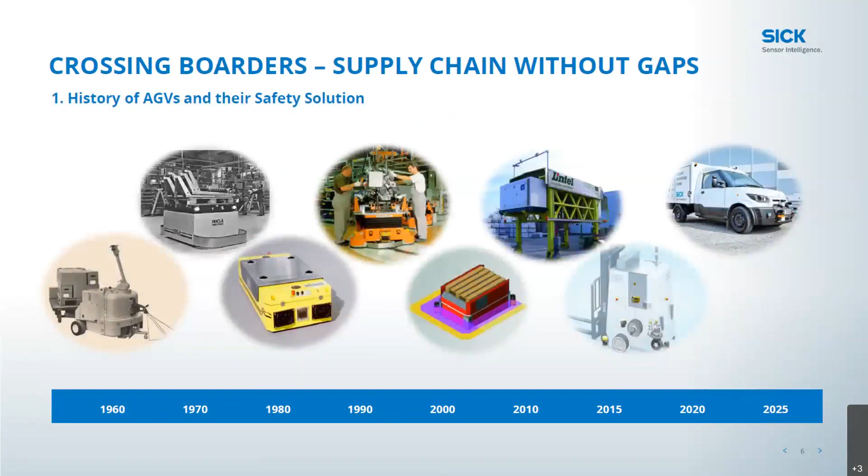A very brief history of supply chain and AGVs. I won't go through each one of these individually, but rather just show you where we've come from. If you go all the way back to the early 60s, the concept of automated guided vehicles had started then, with simple things that made sure AGVs didn't run over people by having tactile metal frames on the front of pallet jacks, automated pallet jacks and things like that. And those went into real bumpers that could stop the vehicle.

All the way up until the early 90s when SICK invented the safety laser scanner, the PLS, if any of you are familiar. SICK invented that product for this industry almost 30 years ago now, and it has just grown since then, obviously, with more and more automation happening. So we've gone all the way up to be able to do speed control, and now, as you'll see later, into outdoor safety.

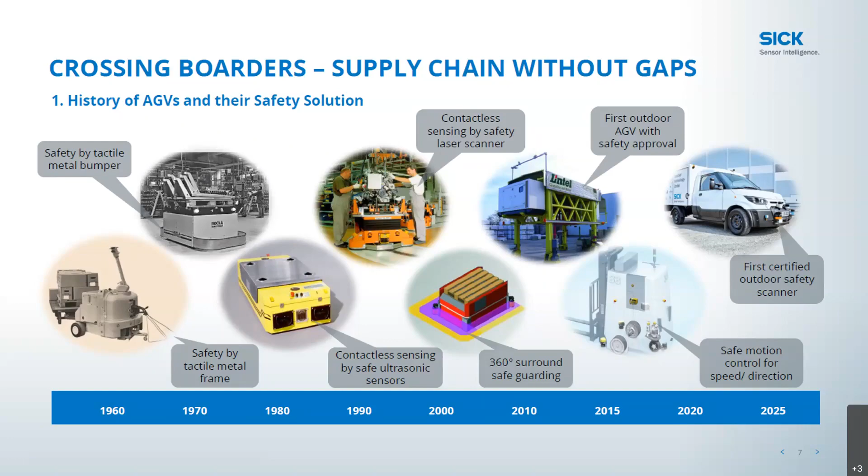You guys have heard the mobile platform moniker, and I just wanted to speak briefly to what a mobile platform is. AGV is the accepted term we've heard for years and years, automated guided vehicle. But more and more people around the world are using different terminology to talk about this technology. We can be talking about AGVs, automatic guided vehicles, AGCs, which are carts, AMR, which is autonomous mobile robots, and all the way up to service robots and cobots. SICK lumps that all into one term that we consider mobile platforms, because many or even most of the applications that one does, the other one has some way of doing it, and so SICK calls that mobile platforms.

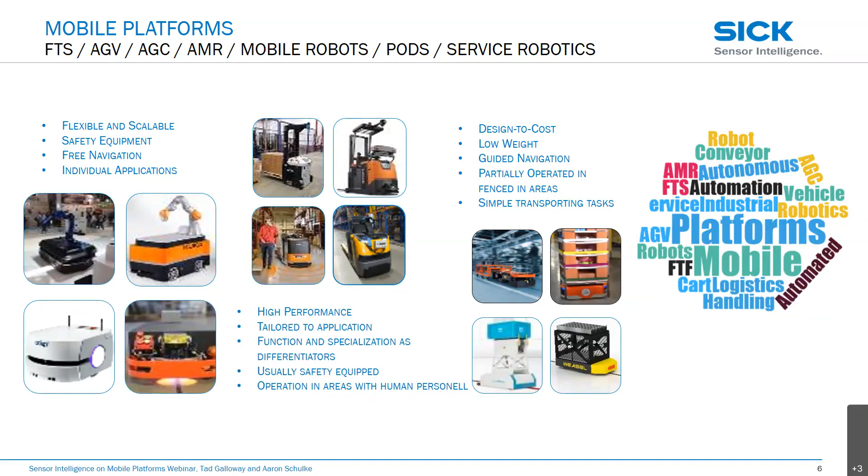Why do we need AGVs or mobile robots or mobile platforms? Well, as we all know, going back six months, unemployment, especially in the U.S., was as low as it's ever been. It's hard to get people, so we need robots or mobile platforms to do the easy jobs. Now we're facing a different thing with coronavirus, and unemployment has gone up, but the reason is people can't be in close proximity to each other. Because of that, AGVs or mobile platforms do the jobs that would normally have people doing, and we can have less people in factories. So technology is enabling vastly more functionality, from simple tasks all the way to much more complex lights-out factories, and outdoor.

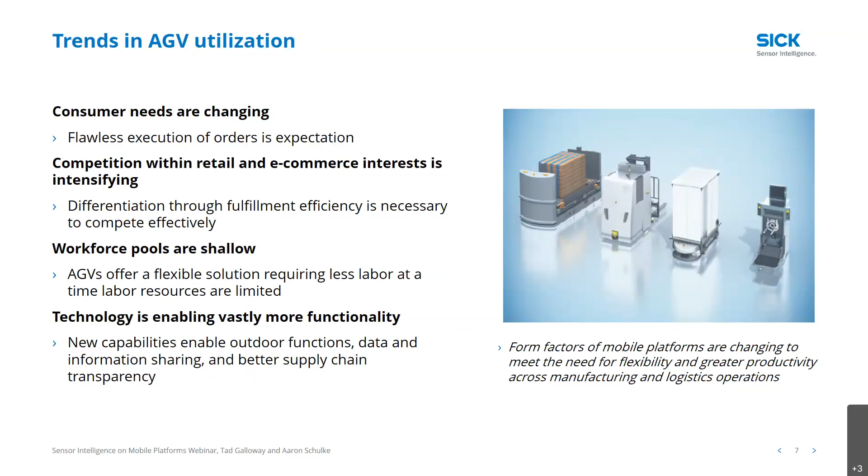Just a quick slide on what type of industries this affects. E-commerce is a big one. We all know the Amazons, the Walmarts, the Targets, that they're doing more and more e-commerce, and with more e-commerce you need more automation. Flexible production, the automobile makers and factories need to be able to move on the fly and change. And then we've all heard of Industry 4.0. Industry 4.0 is something that SICK takes pretty seriously, even going to our tagline, which is sensor intelligence. That's not just a catchy tagline, we actually mean it. It's something we specifically strive to be able to do with Industry 4.0.

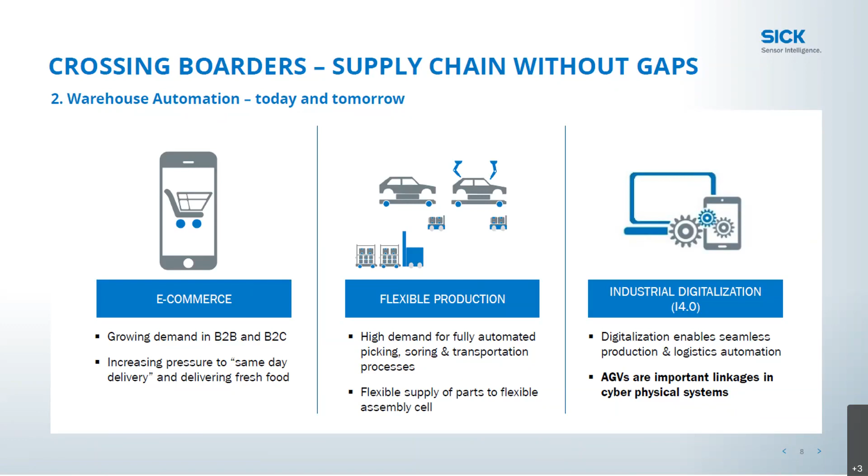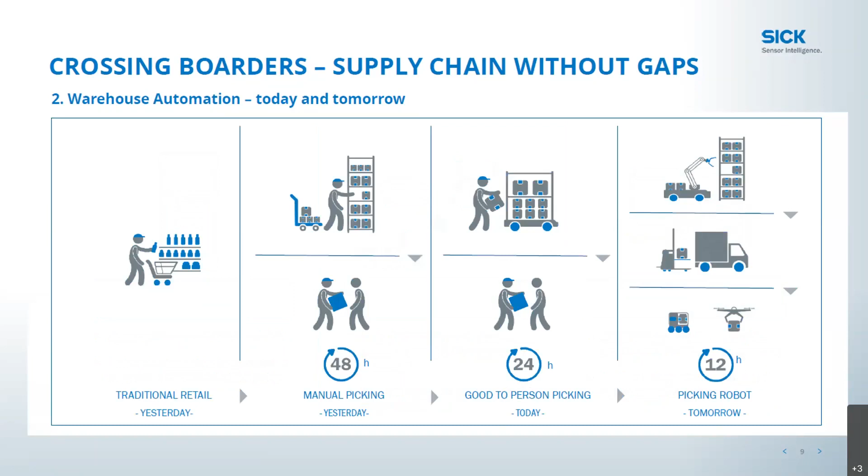Again, the history and then the future of what's happening in automation. Traditionally, one person picks one thing and that's how they get their good. Then we get into more e-commerce with manual picking and goods to person, where somebody's picking it and bringing it to you. Going into the future, and the future is now, more picking is done by robots, then loaded onto trucks by robots, and the trucks, which eventually will probably be automated as well, are taking them somewhere. Amazon and FedEx are already talking about drones delivering them to your house. That gets into more outdoor relevant stuff, and that's one thing that has never really been a capability of anybody in the industry: outdoor relevant safety.

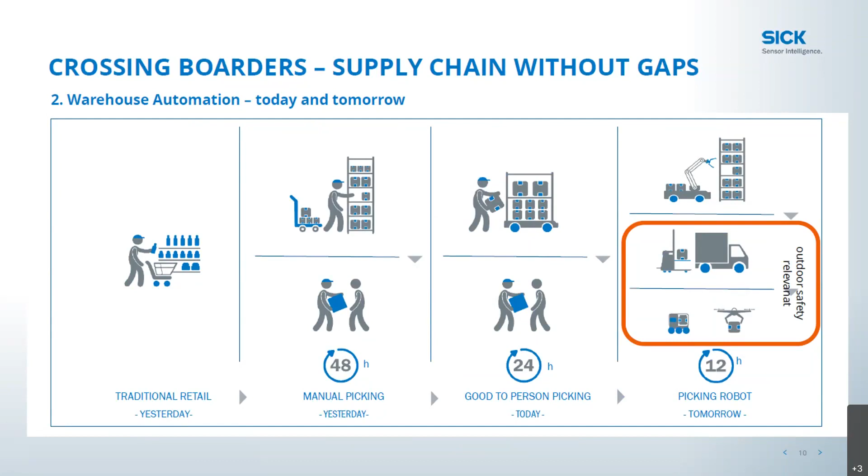Some of the different applications we're talking about: safety, so they don't run over or hit people, collision avoidance, load handling, navigation, and so on.

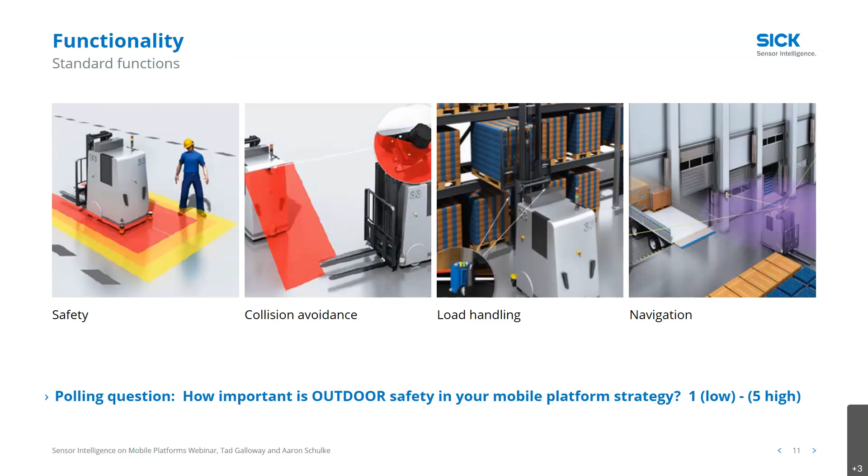We'll go through all of these different things, but I mentioned all the different functionality, and we'll talk a little bit about this in our demo that Aaron and I will go through. But all of these are things we can talk about with SICK products and sensors in mobile platform applications.

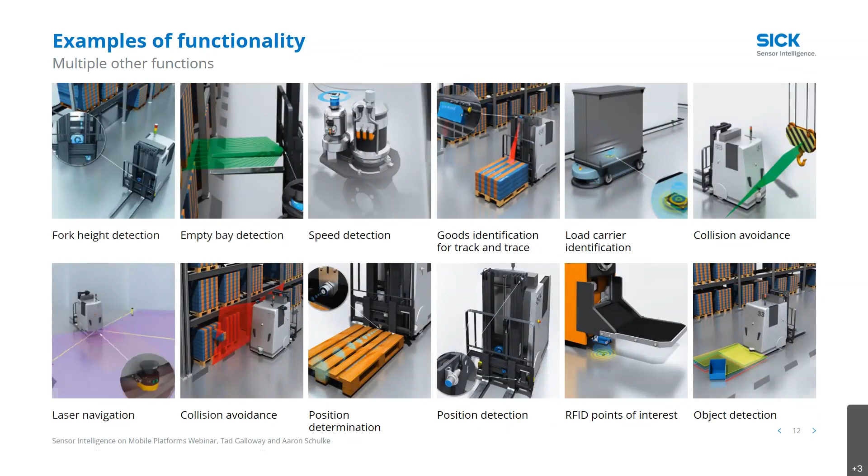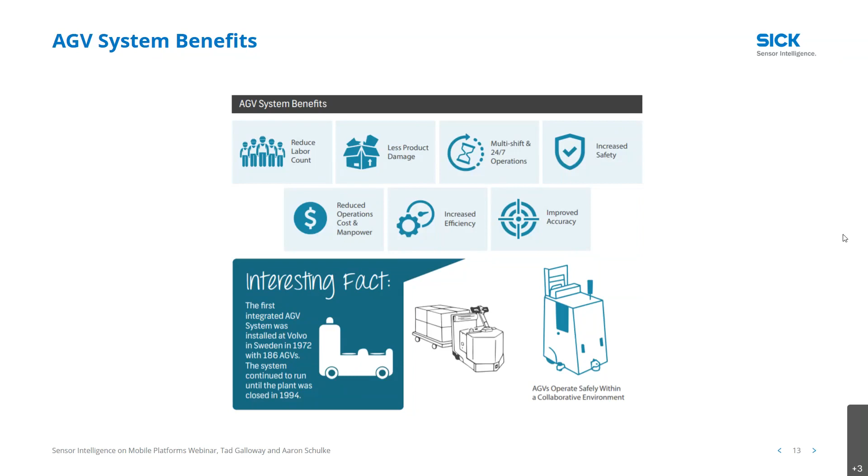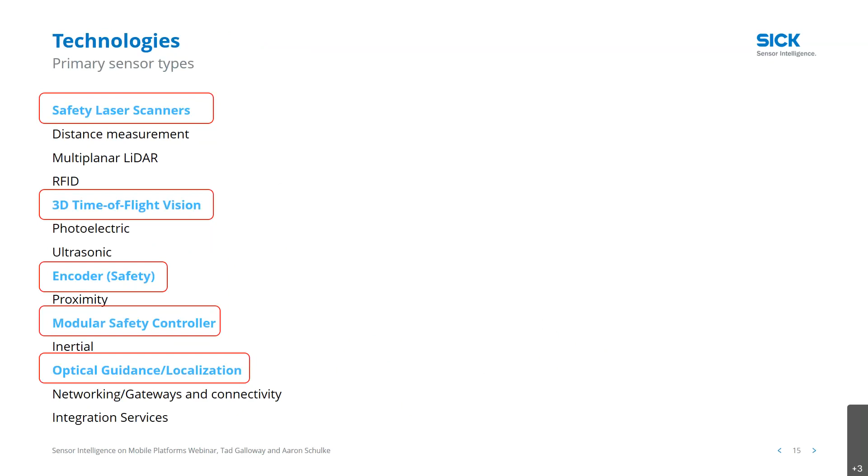So let's take a look at our demo, and for that, I'm going to pass it to my counterpart, Aaron, who's going to talk us through the safety portion of our online demo here. Aaron, you want to take it away?

Yes sir, thanks Ted. So as you guys hopefully can see now on our screen, we are sharing our demo that allows us to visualize some of the different products possible within a safety system of a mobile platform. What we're going to focus on here, because the products can potentially be purchased or used or tested individually for these different applications, but you gain a lot of power when you start combining these products and creating a larger safety system versus just using the individual ones.

There's certain situations where a product on its own is going to be fitting for the application, and other situations where combining these provides a lot more benefit and allows your system to operate more smoothly and efficiently. So to get more into the safety system aspect of that, we want to focus on a product we use called Flexi Soft.

This essentially is a safety controller that has the ability to take sensor inputs and then do some programming with it to get some sort of logic. So those inputs from the sensors will go through some function blocks and produce some sort of output. Most likely those outputs are going to be, on a really basic sense, stopping your vehicle, maybe slowing it down or sending a signal to slow it down. But ultimately, the safety of the Flexi Soft is kind of the central nervous system when we talk in terms of this safety system.

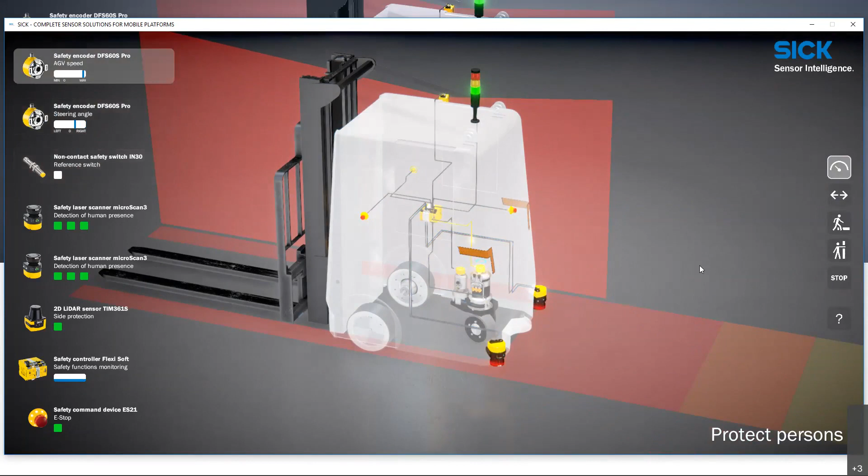When we're talking about position, we're talking about steering. So if you have a steer shaft that we can put an encoder onto and feed back into the Flexi Soft, as you turn that steer shaft, that information can be translated to the Flexi Soft and then sent to the laser scanner to change the fields in which we monitor.

This makes it really easy to pass this information back and forth through the Flexi Soft, allowing these various products that are monitoring different things to all work together to achieve the same goal of protecting your vehicle as it is in travel.

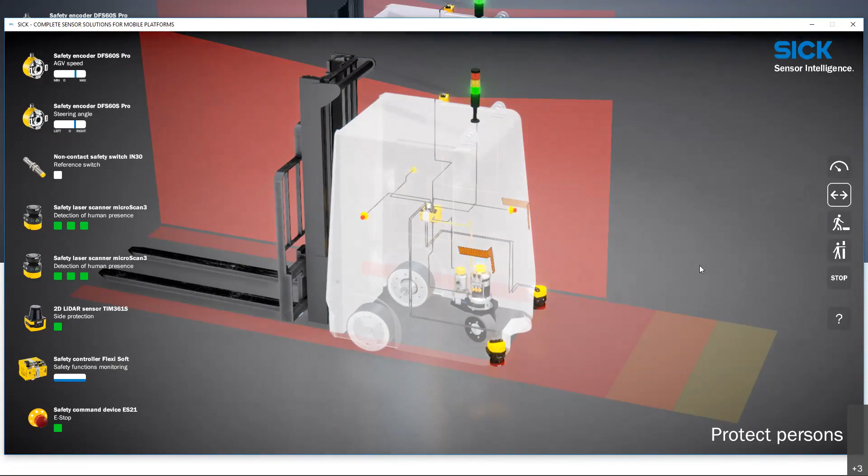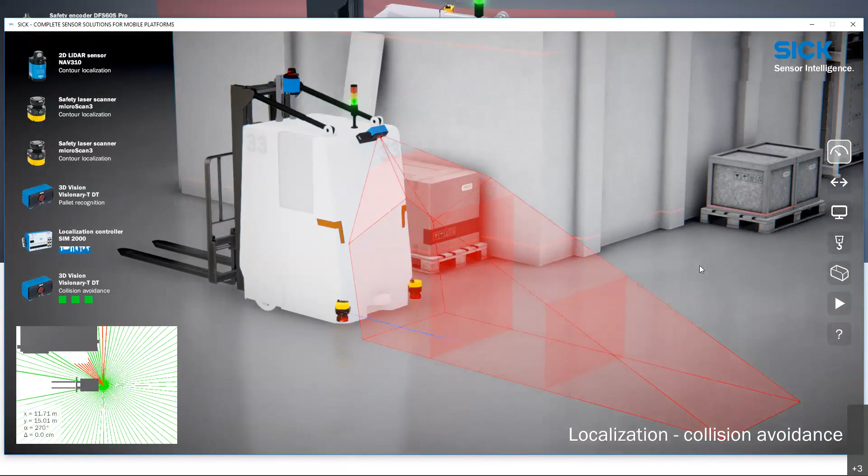So if we want to change the view we're looking at and look at something else you can get from the laser scanners, this is a look at localization or measurement data. On this view, in the lower left corner, you can see what the laser scanner is actually seeing. From the laser scanner's perspective, we have access to the 2D LiDAR point cloud as the vehicle is in travel.

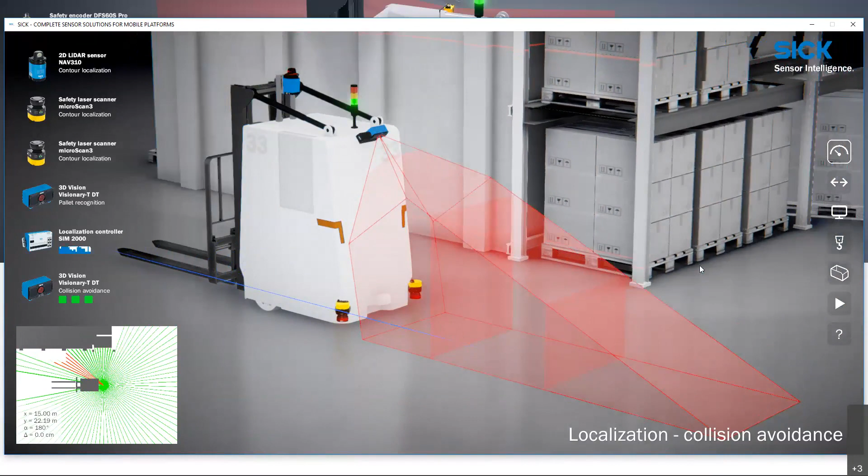That information could then be fed back into a navigation system. SICK also provides solutions to actually do localization as well. So if you need to know where in space or within a map you are located, we can provide that information, which you can feed into your path planning of a vehicle. From the laser scanner standpoint, this makes it really nice because it's kind of a two-in-one product. You get the safety aspect of the device we were just looking at, and you get the measurement data at the same time.

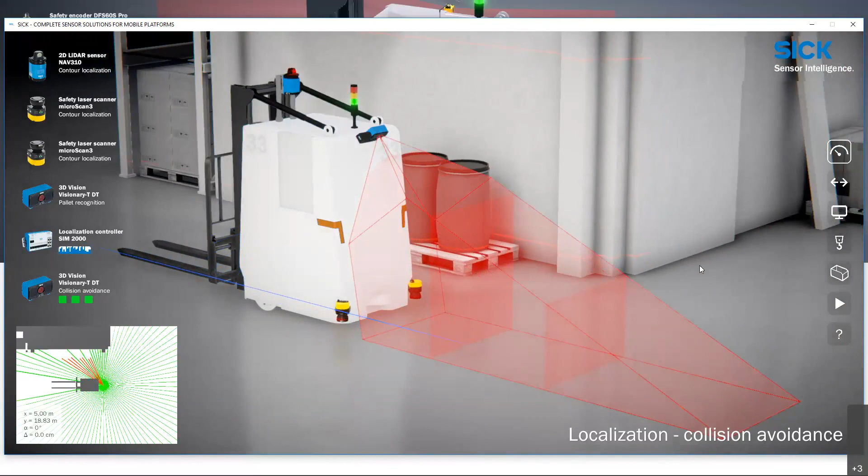As you can see, there are some other products that can provide this localization. This is one solution we offer from a 2D LiDAR standpoint, but there are obviously other ways we can do that as well. And so to dive into some of the other features we can offer, I'll let Tad take it away.

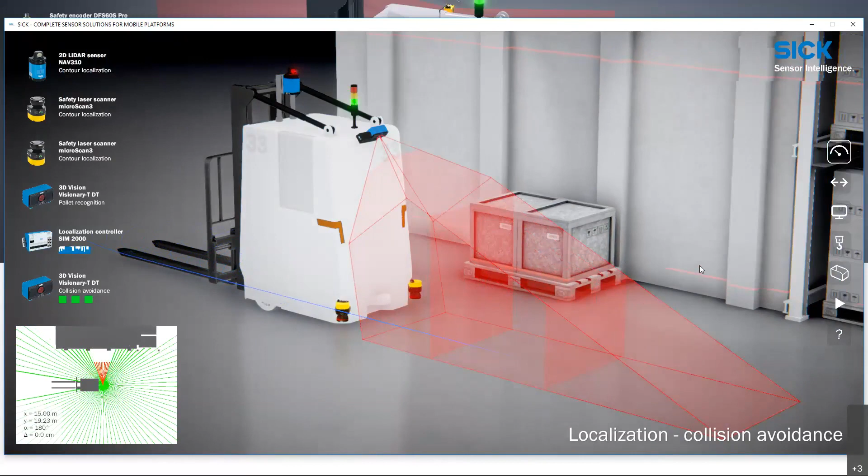Thanks, Aaron, I appreciate it. One clarification that Aaron talked about that maybe took me a while to get my head around is that SICK does localization and mapping. What we don't do is the actual path planning, and that's a key differentiator that some people may not pick up on. We don't want to step on our OEMs' toes, the people that make the AGVs that work with us. That's what they're good at. They make the vehicles, they do the path planning, that kind of thing.

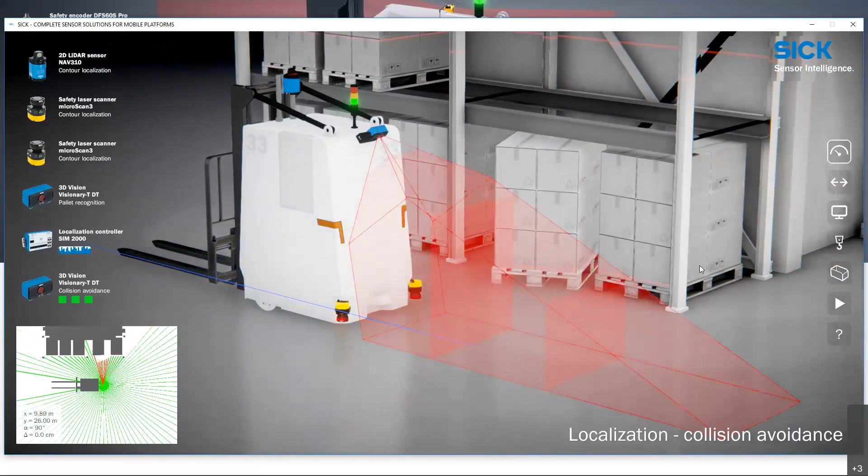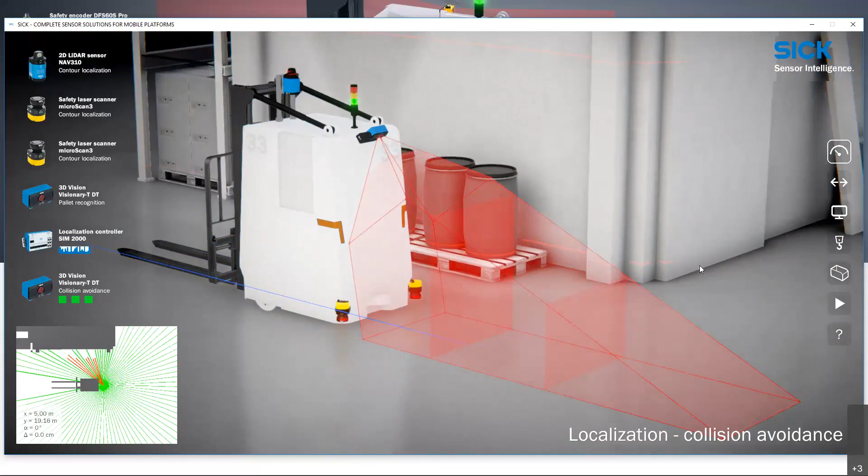We do have the localization and mapping, as you can see down here in the bottom left-hand corner, with some of our different products, not only hardware but software products. And as Aaron said, we can use the safety scanners, which are the yellow ones, to take in the information. We can also use, up here in the top left-hand corner, the nav products. The nav products work on the top of the vehicle. Up here in the middle top of the vehicle, what that's doing is triangulation based on looking at different parts of your layout.

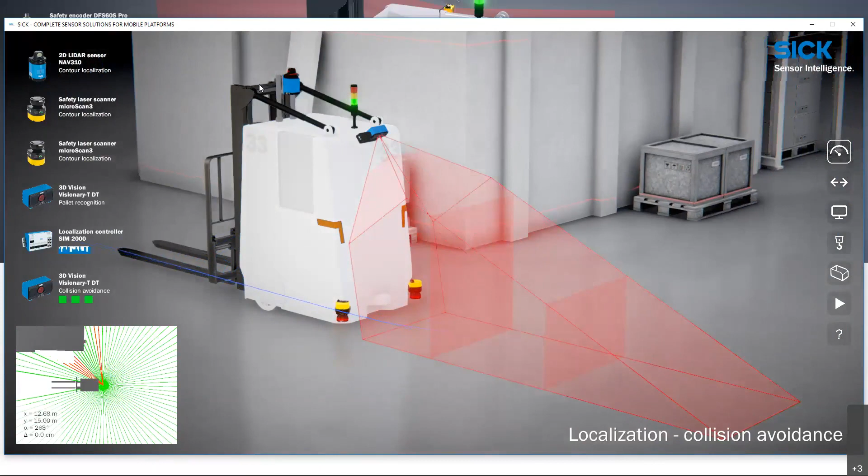You can do it with or without reflectors so that you can do triangulation, but all of that is feeding data back into our localization software to where the OEM or whoever's making the vehicle can do path planning.

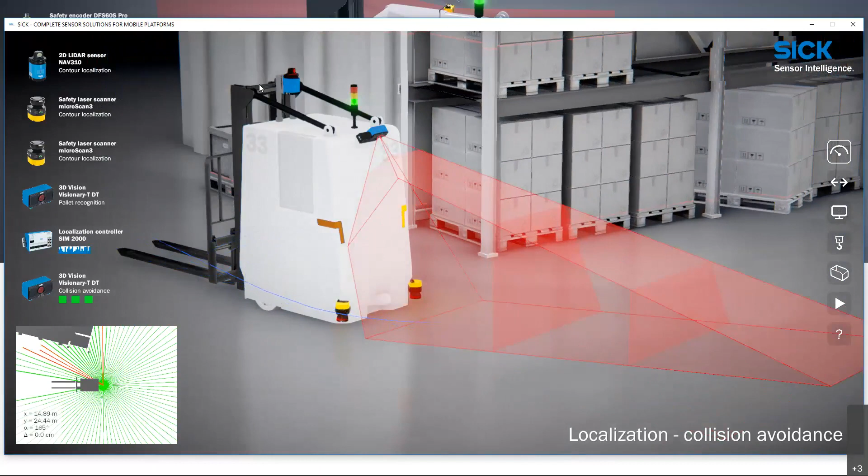The other thing we really wanted to point out here was our 3D vision, what we call our Visionary T product. That product is actually true 3D vision, sending out LED points of light, and we're able to look not just in a single plane like with some of our laser scanners, but now we can send out many points of light and see a 3D rendering of something that's in the way.

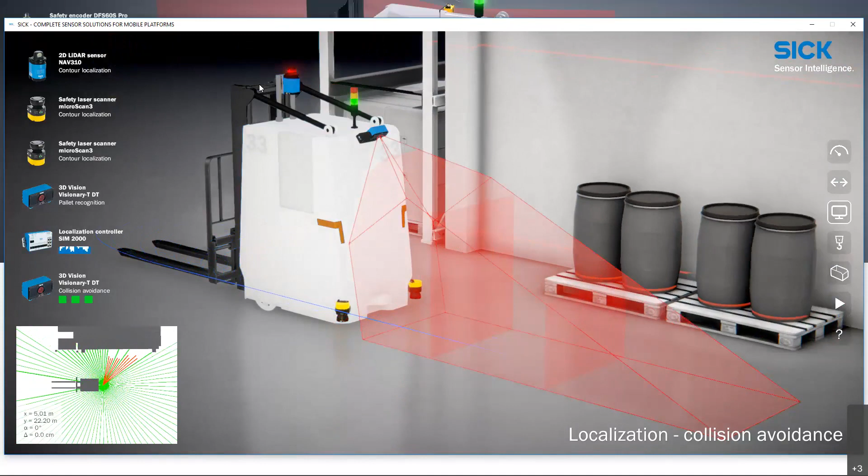One of the ways we show that is when an obstacle is activated, you'll see that over here on the right-hand side. In this particular case, we call it an overhung load. It could be a crane hook, it could be suspended forks from a fork truck or another AGV, something that wouldn't necessarily get picked up by the safety scanners on the floor, because usually those are meant for picking up ankle level issues.

So we'll move on to the next view, and again, if you've got questions, feel free to text them in the chat box, and we can talk about those later.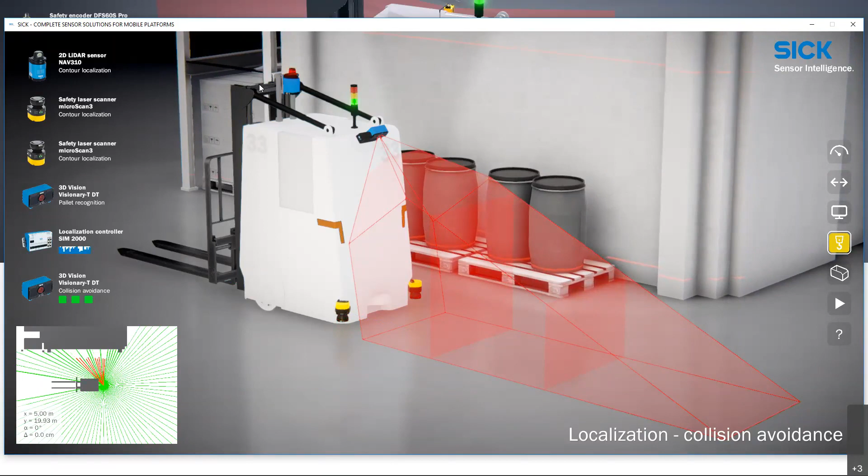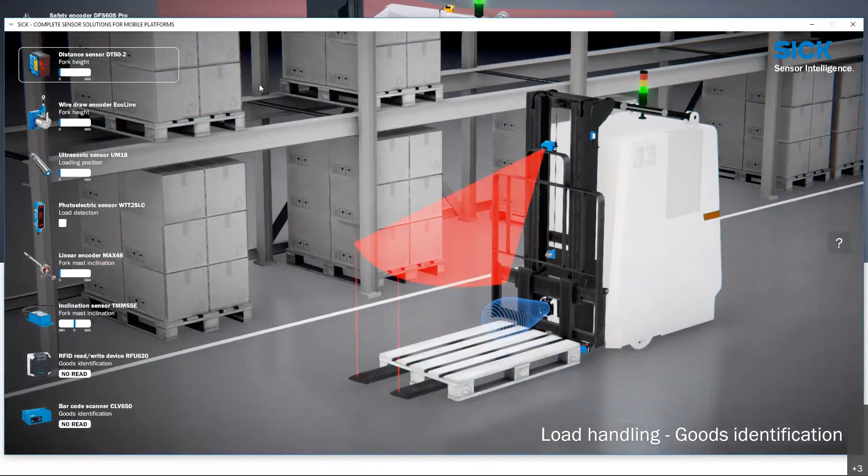But moving on, we mentioned several other different applications and several other different sensors that we can talk about, and we can do multiple different applications with different sensors.

So, for instance, the top two here talk about the height of the forks. The typical way it's done is with a wire draw encoder. As we go up, you'll see in these demos that the thing we're talking about will be highlighted. Here in the middle of the screen, you can see the wire draw encoder as I move it up and down.

But also, we can do the same application with a laser and be able to tell the fork height. Going down for load positioning, seeing how close the load is onto our forks with ultrasonics. We can also do load detection with photoelectric sensors in the tips.

And then inclination is becoming more and more interesting to different OEMs and different customers. Linear encoders can do that where they're positioned inside the hydraulic cylinders or even outside. We've got several customers who are using them without doing it inside the cylinder at all. But we also have inclination sensors that are 6 degrees of freedom with our TMM products.

And then the other thing that SICK does a lot of in different applications, not only AGV but also in warehousing, retail, courier, airports, and things like that, is both barcode and RFID for detecting the goods that they pick up. So if you notice, we've got different IDs for different pallet loads, different goods.

So let's switch back over and talk about some new products that we don't have on here. So what are some other considerations that we'd like to talk about? Well, 3 new products, and I say new, some of them have been out for a little while. At least 2 of the products on here have been out for about a year and a half now.

But we've got our outdoor scanner, which again, SICK is the only outdoor safety rated scanner on the market. We've got our NanoScan, and I'm going to let Aaron talk to both of these two because they are safety rated products. The NanoScan is actually the smallest safety scanner on the market. And then we've got our TDC, which I'll talk about in a little bit. But Aaron, you want to talk a little bit about the outdoor scan?

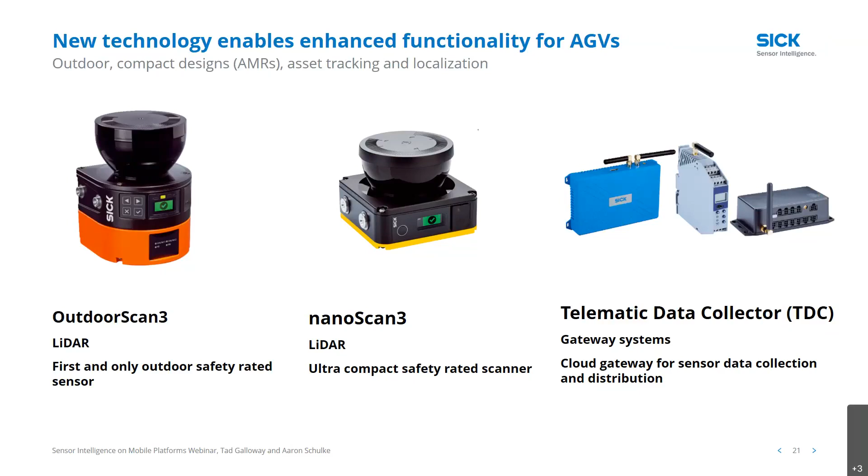You bet. So from the outdoor scan standpoint, it's actually going to be very similar to the laser scanner that we were looking at in the demo. In the demo, that was our Microscan safety laser scanner, which is really intended for the indoor space. With the outdoor scan, the key difference between this product and the Microscan is that certification for outdoor safety use.

This is in accordance with ISO standard 13849 and IEC standard 62998. This allows us to use the scanner in both indoor and outdoor spaces, as it's been tested and approved for that.

How we achieve that, there's a couple of things going on. Ultimately it comes down to our scan technology. We've introduced something new in the microScan called Safe HDDM. This is SICK terminology, and it stands for high precision measurement, which allows us to get a very reliable data point when scanning the environment.

Since we have a reliable data point, we can run it through various algorithms specific for the outdoor space, allowing us to operate better in rain, snow, or fog conditions.

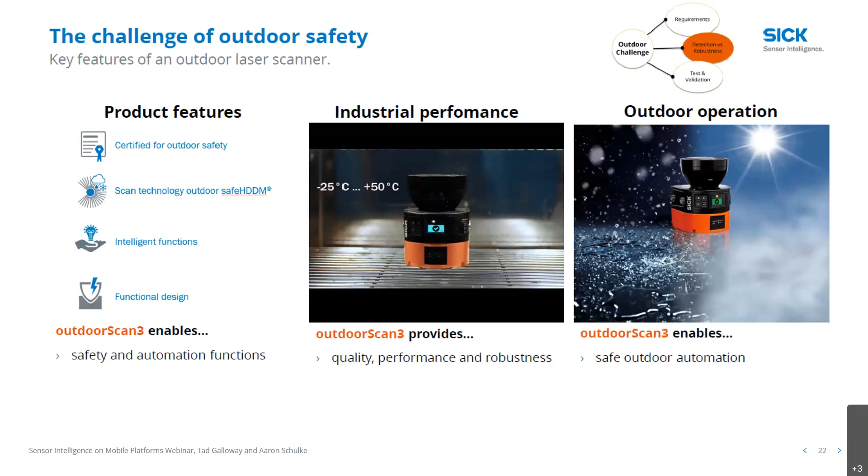Let's look at the next new product, the NanoScan. This product has only recently hit the market within the last month or so. Again, a lot of similarities to that microScan product we looked at earlier. But essentially we took that product, which is a bit larger, and smushed it down into a nice compact, form-fitting housing.

Same technology, which provides very precise measurement. That measurement data is available, but because of its size, we're now able to tackle new challenges, smaller applications, tighter fitting mounting locations where products previously just couldn't fit or accommodate.

We can mount this very close to the floor, which will allow you to, as shown in this picture, potentially shoot under pallets and see underneath them, opening the door to new solutions for problems that have been out there for some time.

In addition, this is a really powerful device. Even though it's small, we have a lot of functions built in to allow you to do that changing of fields like we looked at earlier, changing on the fly based on various signals from your system, whether from the device, the sensors directly, or using our FlexiSoft to create that system approach.

The third new product we're interested in showing today is what we call the TDC, our Telematic Data Collector. The TDC is interesting because we've talked about Industry 4.0, connectivity, and transparency, and all of that feeds back into the TDC.

The TDC is interesting because you can do all those things, as well as asset tracking and getting data from your sensors back to a central repository for your AGV or your warehouse in general. We're seeing more people using the TDC on fleets, trucks, and similar assets to track them, because as we move forward, big data is better for tracking in general purposes in industry.

So here's another polling question you'll see on the right-hand side: is asset tracking and localization part of your mobile platform strategy? Are you doing that? Is that something you want to do? Give us your feedback. We're always interested in seeing if we're going down the right path and how we can align our technology with your plans. I'll give a few seconds for you to look at that.